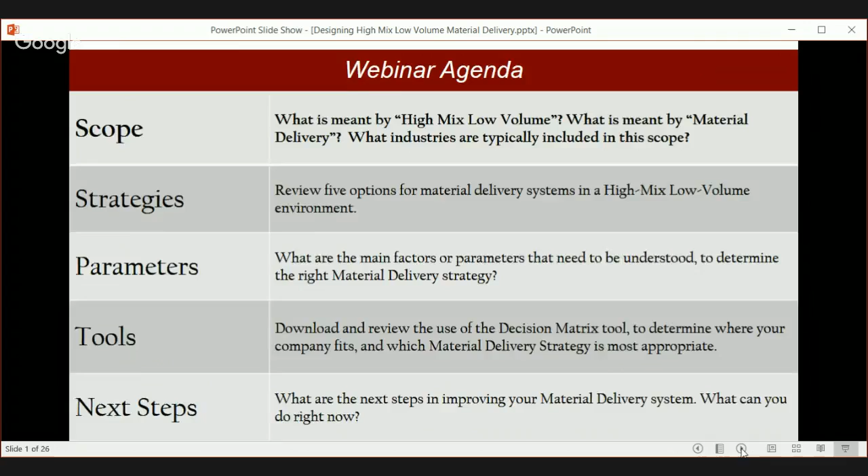What we're talking about with high mix, low volume is a production manufacturing environment with many different models or products. You could have base models, but typically in a high mix, low volume environment, you've got lots of options, or configured products. For example, you could have a base model 100, but the customer could order literally hundreds or thousands of changes, additions, or options to that base model. This is very typical, and I'm including that in high mix, low volume. It doesn't have to be completely different products—it could be base models with lots of choices, to the point where almost every product coming down the production line could have some differences.

That is not unknown. The main point is, from a material point of view, we have lots of different material to manage. By manage, I mean we have to buy it, get it in-house, and then get it to the point of use at the right time, in the right quantity, in the right container, and all of those challenges. That's the essence of high mix, low volume.

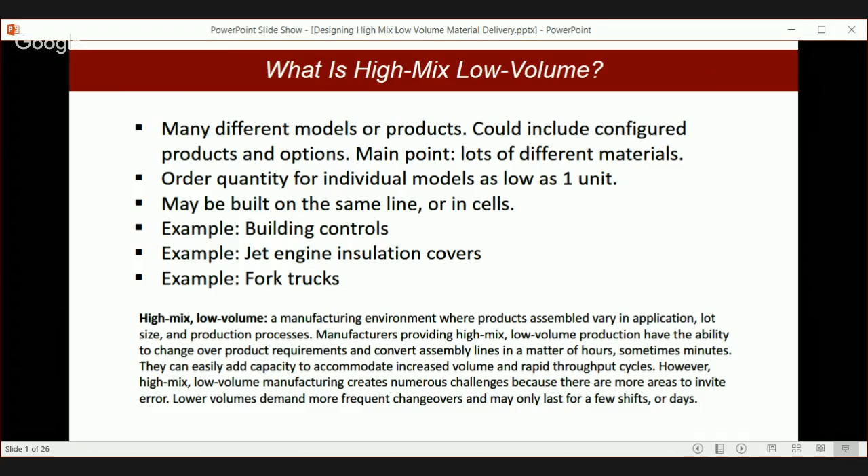Okay, so I hope that sets the boundaries then in terms of what we're talking about. Let's continue with some discussion of that.

Industries where typically the production environment is high mix, low volume: aerospace. As I mentioned, we don't build that many airplanes relative to other types of products, so it's inherently low volume. These aerospace suppliers in particular typically have a range of products they're supplying, but not that many of any individual product.

The other one is electronics and computers. Now, some electronics and computers are very high volume and very low mix, so mass production of some of these items. But we do have other types of electronics and computer products that are highly customized. For example, data storage, where a customer has very specific requirements, high involvement with your engineering design department, but you're not really building that many of any individual system, but they're configured to order or highly customized. So that would not be unusual.

Industrial products, what am I talking about here? I can think of a few places we've worked. One was industrial pumps, where again, they're building what may seem like a lot, but a lot of variety, a lot of unique characteristics, and mixing different pump sizes going down the line and having to deliver a lot of material to the same line. And then in general, I've listed here mixed model production. Again, to remind those of you who have worked with us in the past or been to previous webinars, we, Leonardo Group, we're kind of the mixed model guys.

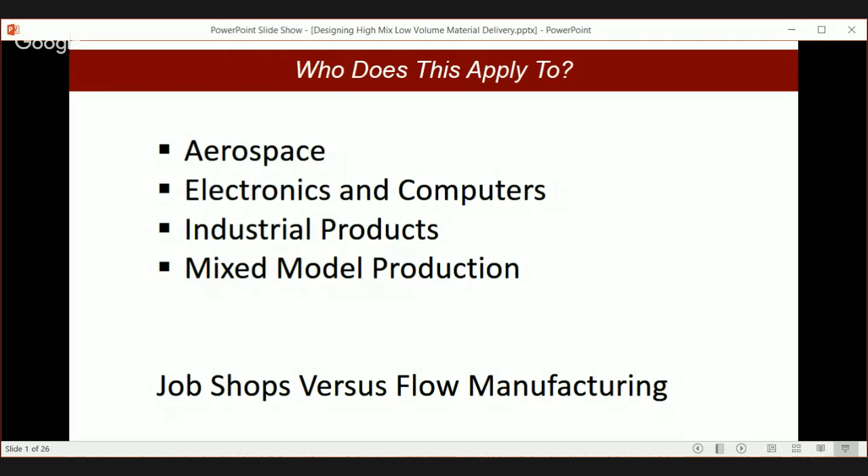I'm thinking more of production lines or cells, where you have sequential work and you're trying to deliver the material to a running line. Okay, so one more point in background, and then we'll get into the heart of it, the guts of it. What are our goals when we talk about material delivery? By the way, delivery means how do we get the material that was delivered from outside to where it's consumed, which is what I'm calling the point of use or points of use. So how do we get it there and meet the following criteria?

Number one, don't run out. Probably that's the most important thing. When you stop the line because you ran out of material, that's a big negative, because not only are you impacting all your internal processes, all the internal customers and operators there with nothing to do, et cetera. Huge waste, huge cost, but you're also impacting potentially your outside customers who are waiting for those products. So don't run out is kind of a big deal. We don't want to do that. So we want to have a system that's pretty bulletproof.

Now, I'm not including in don't run out your ability to procure the material from outside, from the outside supplier or from an internal department. That's outside the scope of this delivery. We're just saying, how do you design a delivery system to get it to where it needs to be, in the right time, in the right place, in the right quantity? The issue of getting it from outside suppliers is more of a supply chain issue, hugely important, but different.

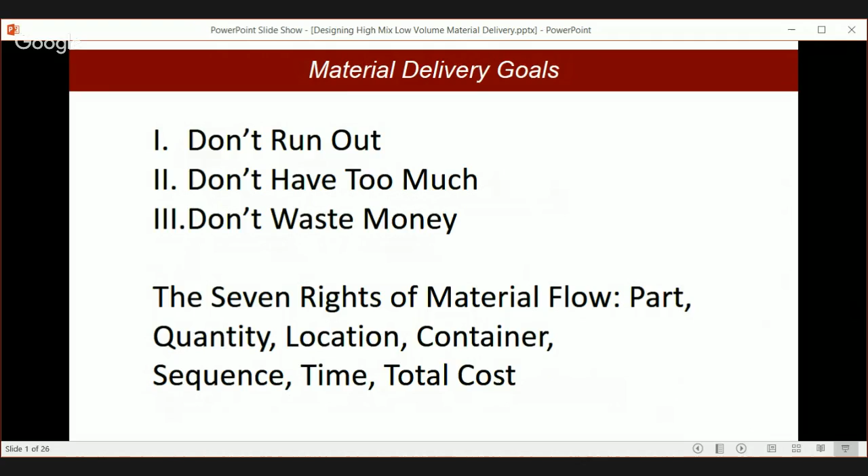So total cost is from the company, not just from the material management or material handling department, but from a company perspective, the right total cost. So if we keep all these in mind when we design our system, we'll be doing well.

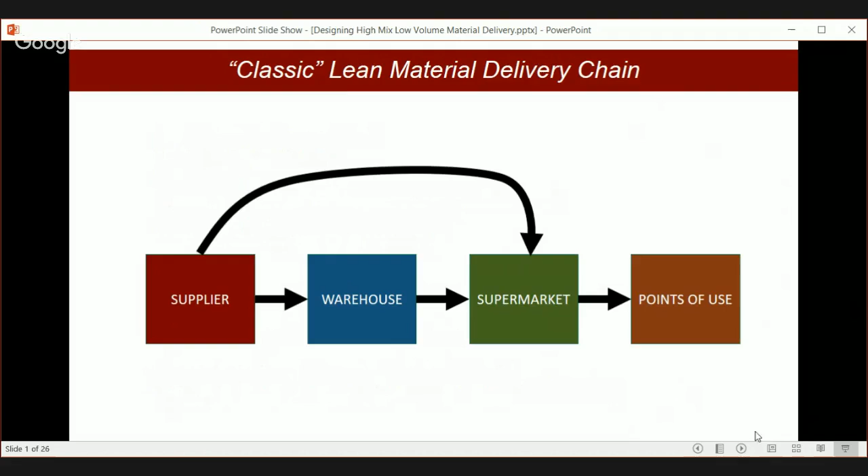But now we're talking about high mix, low volume. So let's get into it. I'm offering 5 options - different strategies that we've seen implemented depending on the environment. Let's go through them one by one. We'll discuss what they are and then show you the block diagram of how that might work for each. At the very end of the webinar, we're going to talk about how you might decide which one to choose. And of course, you don't have to choose just one - we have one of the options which is hybrid, so a mix of different systems.

So let's look at this first one, zero kitting. In the past, in my background as a lean consultant, maybe 10 years ago or even less, our philosophy with material was to try to avoid kitting at all costs. Because the logic at the time was that kitting is extra effort, and material handling is an overhead function or non-value-added kind of activity. So if we can figure out ways to just deliver that material to where it's consumed without having to kit it, that would be preferable.

Now, I'm noticing a sea change in that attitude over the last few years, where companies, especially leading lean companies, are much more open to this concept of kitting for a number of reasons. One of the reasons is floor space on the factory floor. Another reason is quality - reducing the choices that an operator has to make. And the third reason is operator productivity.

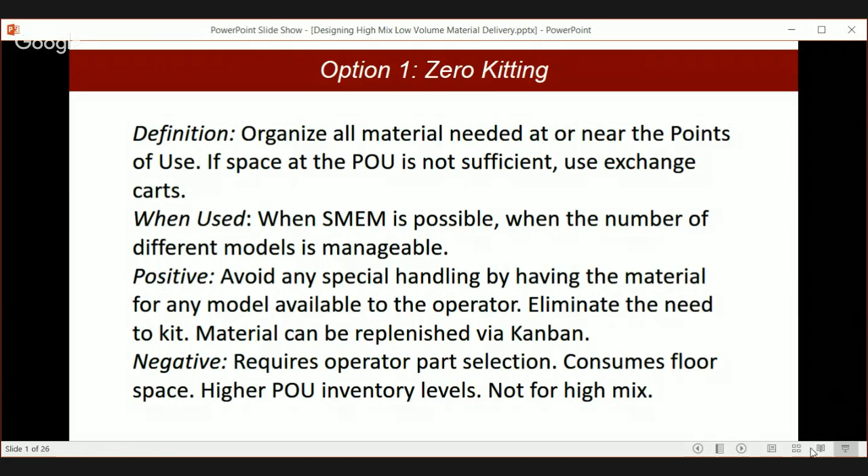Could be a two-bin system, say, on these carts. So at any given point of use, you might have more than one cart, you probably do. But in terms of replenishing those carts, it would be kind of a standard methodology. As a bin is empty, it gets put in a collection spot, and that signal goes back to a supermarket and it gets replenished, put back on the cart.

You would usually, to get this to work, need to have a longer takt time. If you have a very short takt time, it's hard to see how this would work because you do have a changeover when you're swapping out the carts. So it would be hard to overcome that changeover time if you have a very short takt time kind of environment.

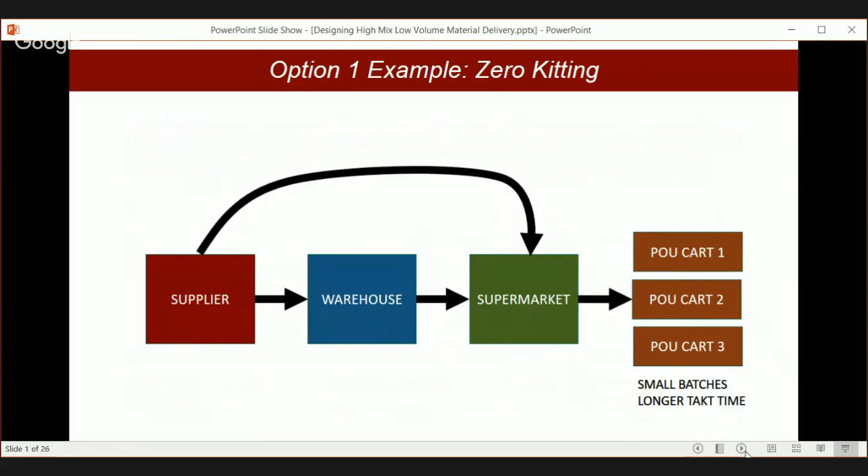You could actually use this as well for running small batches, so small order quantities could use this methodology. I've seen this method work, but usually it's in an environment where the number of different part numbers that had to be managed is lower. Still high mix, low volume, but not on the extreme in terms of the number of items that need to be stored on these carts. So that's your first choice.

Option number 2, kitting cells. So now we're entering the realm of kitting. Kitting is selecting a set of parts, not in front of the operator, but delivering to the operator a set of parts to be used for a specific model and based on a production sequence.

So you'd have to have a lineup or production plan. You'd actually have to have an MRP system, material requirements planning system, that would tell you not only what's required for that unit, but where, and eliminate from the pick list or kitting list the items that are already there, if you have a hybrid kind of scenario. This could be a set or a kit for a small batch, or even as low as a single model.

Now, where is the kitting done in this scenario? Well, it's done at the supermarket itself, not adjacent, although the supermarket is somewhere in the area, it's not adjacent to the points of use. And the reason for that is we're assuming in this scenario that you have a supermarket that's supplying many different points of use, multiple customers that you're supplying to.

Now, when would you want to use kitting cells? Clearly in a scenario where zero kitting is not going to work for you. You have too much variety to present at the point of use, and you have a shared supermarket feeding lots of different locations. So what you do is set up a cell, meaning a number of kitting stations, and organize that material in the supermarket logically, so that ideally someone could just walk in a U shape or walk down the line and restock kitting bins or kitting trays in an efficient way.

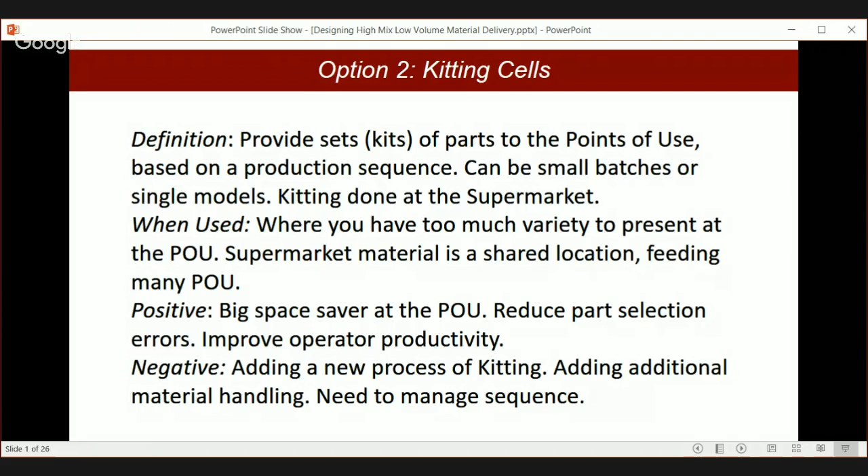Okay, so let's go on to the next one. Here's the example of the kitting cell. So what we have here is, again, classic up to the supermarket, and then the supermarket—before we go to the points of use, we have a kitting process. I added the reminder here: sequence. So materials stored in the supermarket, and from there we prepare kits in the form of trays or bins of the parts that are going to be required, and those are delivered to the points of use. You may even have a kit that travels with the unit, so it's not a matter of delivering a kit to lots of different stations—it might just be delivered to the first station.

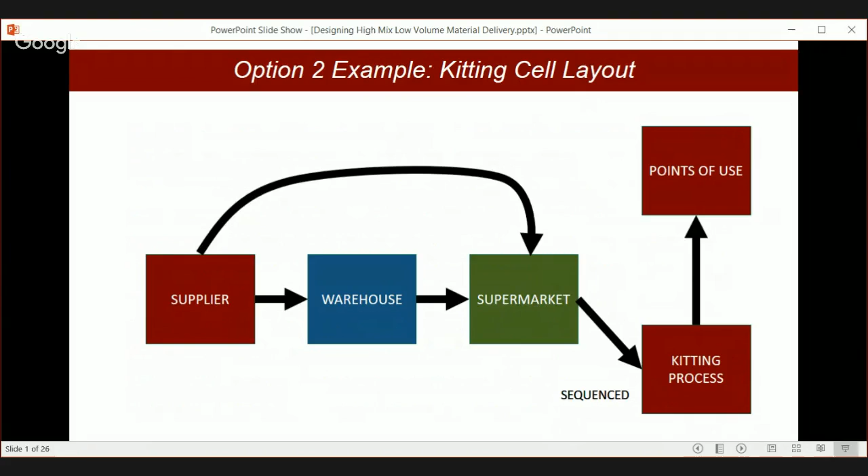And then that material isn't consumed in its entirety at the first station, but it travels with the unit down the line with all the parts they need for that unit. That'd be a good way of having a single point of delivery right at the line and not having to deliver material in a lot of different places. But this is how it would look. So this kitting process and the supermarket are really co-located, right? They're together. And then the points of use are wherever they are, not that far away, but they're not exactly next to the supermarket necessarily.

All right, so option 3, how are we doing on time? It's 11:40 Mountain Time, so we got 20 minutes. I think we can make it.

So the next one's called kitting integration. This is a great one. I've seen some great results with this. So what we're talking about here is, yes, we have too much variety. We need to do some kitting, selecting of parts. We can't just stage them in front of the different workstations. That's understood. But what we're going to do here is, instead of having a supermarket and a kitting process that's somewhat detached, we're going to connect it directly. So we're going to essentially add a material replenishment loop into our production line, and it's going to run at the same takt time as the line.

So when would we use this? Well, if you have enough volume to justify setting up what's essentially a specialty supermarket with the parts for this line only, and it can handle very high mix potentially. And what we're going to do here is integrate as an option the workstations and the material storage into the same unit. I'll show you an example of that here in a minute.

So what we're talking about here is, we don't have a material selection or a kitting process that's separate from the line. It's built into the line itself. So the cart or the container for the material, or the workstation itself, would go through a parts selection process for that specific unit. Every unit could be different. And then you have some workstations that it would pass through. And at the end of the line, when that unit is done, that cart or container would go back to the beginning of the line and get restocked for the next unit in the sequence.

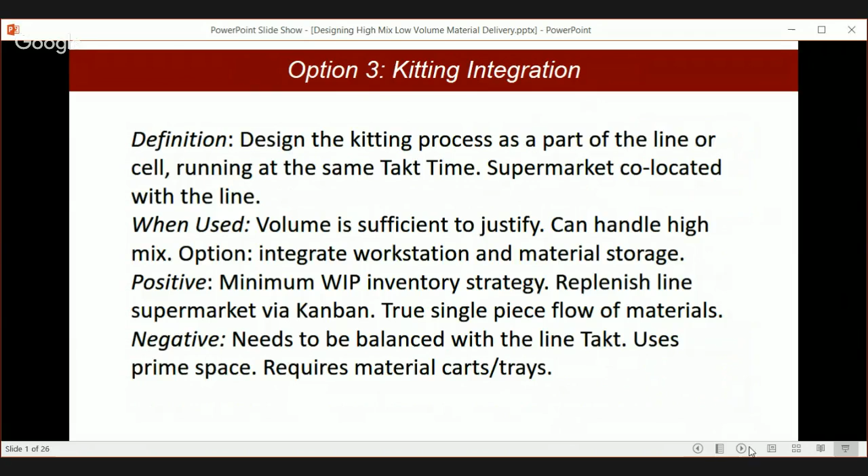So let's look at an example here, and then I'll show you a picture of how this might work. So again, supplier to warehouse, and I put a dotted line around the supermarket and the kitting process and the single line or the cell. They're all within this dotted line, meaning it's all an integrated process. So the supermarket is actually kind of a series of stations within this work area. And then the container, which could be a cart or a bin or an actual movable workstation, is going to go through this supermarket as a series of picking stations, and then it's going to go back to this single line or to a cell, and then once that unit is completed, it's going to go back through the loop again. So you have a continuously flowing loop all running at the same takt time.

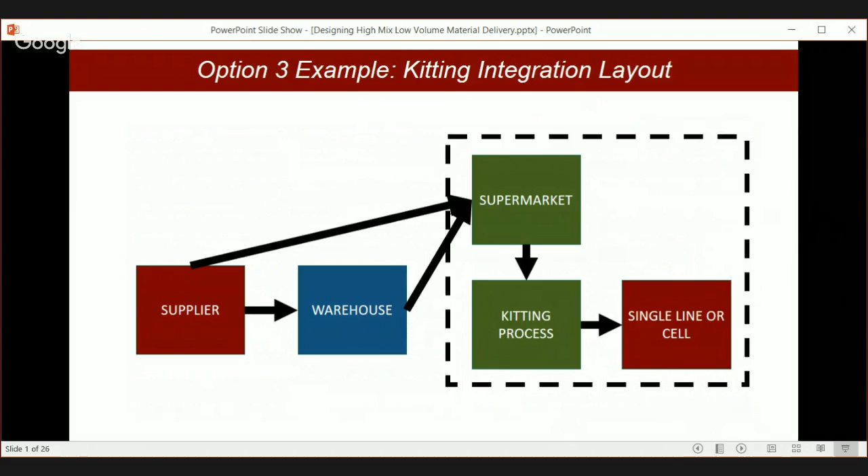All right, let's move on. Remote kitting is similar to the kitting we saw earlier, but in this case it's remote, meaning the kits are prepared off-site, not next to the supermarket. We're pulling material from the warehouse area, usually. So you have a kitting cell in the warehouse, and you're delivering the kits to another location, to the points of use as needed. We're bypassing the supermarket.

So when do you use something like this? Well, you could have a scenario where the material mix is so high that even setting up a supermarket would be a challenge—there are too many items to really want to set one up. There are definite benefits to a supermarket: early warning signal for shortages, improving inventory turnover, and ease of replenishment. But you could have scenarios where it becomes difficult because of the variety you have.

Another case where you might need remote kitting is if you have special kitting equipment. I can think of one example where they were preparing kits of cut specialty materials that needed a special environment. They had a large cutting bed with robotic blades that would cut templates out of this material, but they needed a special environment—some air control—because there was a certain hazard to it. Setting that up right on the factory floor wasn't really a good idea, or even possible.

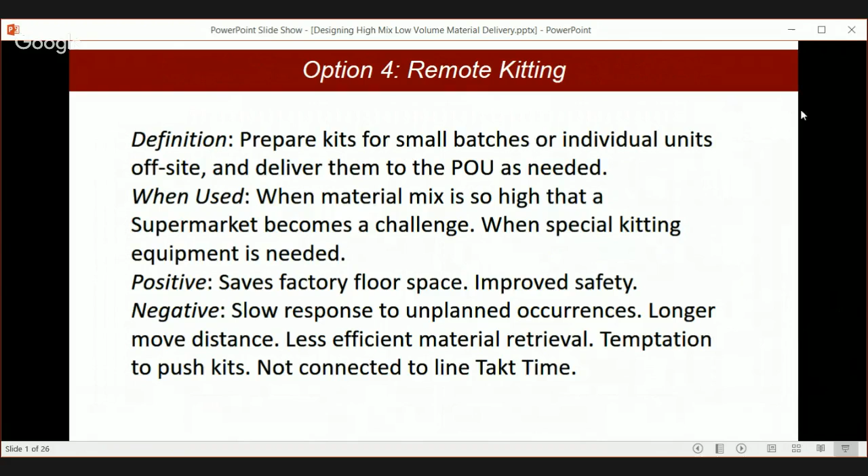So here's what it would look like in a picture. You've got a supplier, and then you have the material coming into the warehouse.

You've got a lot of this material, remember, a lot of variety, and you have a kitting process that you set up here in the factory, in the warehouse area. Now you could have a kind of a mini supermarket, but again, you've got a lot of material, so that was the challenge to begin with. But maybe you have a little more physical space in the warehouse to do that. But you've got a kitting process, and then it gets delivered, maybe even to another building, to the points of use.

So that is how this works, and you'll notice there's no supermarket in this case. All right, so that's an example. And I mentioned a company here. This is an actual company, Hi-Temp Insulation. This is exactly what they were doing.

This is the company that was making the insulation covers for jet engines, and the kitting process involved cutting this material. You can imagine asbestos was involved, and so this was not something they could do on the factory floor. They had to use a controlled environment, and they had these cutting beds, producing kits of maybe 10 pieces, 20 pieces, small batches, but it really had to be done in a controlled area. It was in the same building, but an entirely different area, not that close, and in a controlled environment.

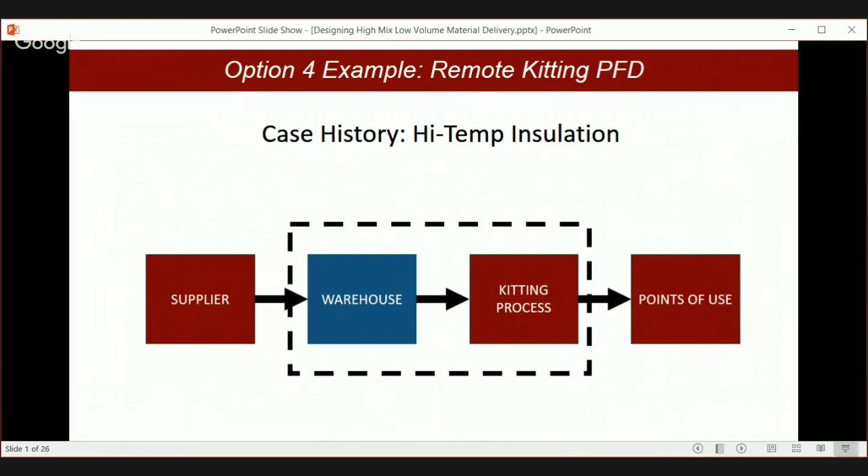So remote kitting. Now here is the last one we'll get to, which is probably the most common, which is called hybrid material delivery. So we're saying here, you don't have to pick one of these four. You can do a combination thereof, try different techniques for different things. So it's a combination of the methods we just covered.

So what we're saying here is some percentage of the items that you need to manage are going to be stocked at the workstations, at the points of use, via Kanban usually. And then other parts will have to be kitted, or they'll have to be sequenced. And so this is an extremely common way of handling a high mix, low volume environment.

Now, you would use this when a certain percentage of the parts that are consumed are common. It's not going to work super well when you have every unit with a totally different bill of material. But when a high percentage of the parts are common, used on multiple base models, for example, then you'd want to set those parts up under a classic Kanban methodology, either two-bin or multi-bin Kanban. You can even use this methodology for the same type of item.

For example, hydraulic cylinders. We've seen an example where this particular factory had, I think, something like 12 different hydraulic cylinders, but only 2 or 3 of them were the high runners, and the others were much lower volume. So instead of setting up 12 Kanban multi-bin scenarios, they set up 3 for the high runners under classic Kanban replenishment, from a supermarket back to the line.

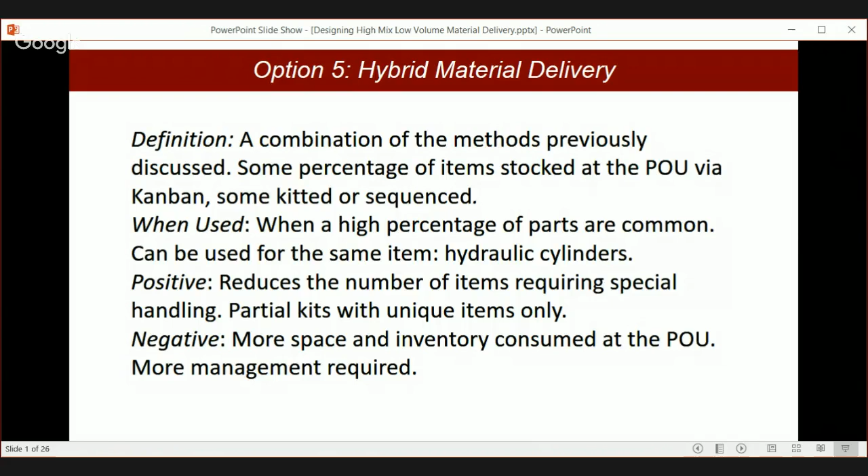This is pretty classic. I noticed some people are leaving. Hang in there for just a minute or two. I'm going to give you a couple examples. I know it's 11:58. We might run over a few minutes, but not much. So here's the hybrid scenario.

You've got a classic supplier to warehouse to supermarket or supplier to supermarket, and then some of the items are going to go through a kitting or sequencing process, and some of the items are going to be replenished from the supermarket via a Kanban signal. Again, classic, extremely common way to handle this. And this is, in fact, how they're doing it at Toyota Material Handling in Columbus, Indiana.

Some of the items, many of them are under standard Kanban control, and many of the items are either high dollar items coming from Japan that are not good candidates for Kanban, or simply the unique options that are typically found on every single unit coming down the line. So they're managing both. I think it's actually 3 different areas.

So they're regular delivery tuggers that come by often. Their cycle on their tuggers is about 32 minutes, if I recall correctly. But those tuggers are going to get restocked at 3 different areas: imported parts, Kanban area, and then sequenced parts. And just do that loop, continually many times a day.

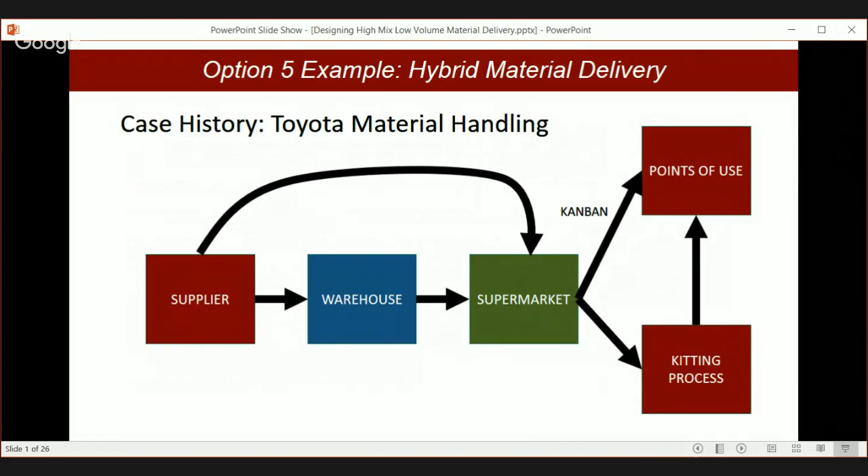Okay, couple tricks. If you have a remote kitting process, what you don't want to have them do is push kits. So what you don't want is a kitting department with a dispatch list and some kind of rule that says X number of days before it seems to be due in production, we're going to prepare this kit and we're going to push it to the production area. You don't want that. Now they need to know what to do next, but they use the dispatch report as a sequencing, not as a demand signal directly.

So the demand signal is going to come from, in this example, a rack. I mean, this is something we actually did. So we had a kit rack. This is going to hold a tub of parts in the example we worked on. It's going to hold a certain number of those. And the signal would be an empty space on that shelf or a card that represents an empty space on that shelf. So the kitting department is responding to those signals.

Give me another one. What was happening prior to this methodology is they were flooding the factory floor with kits that were not needed. And if kits sit around for a while, you know what happens. Parts get cannibalized, they get lost, they get dirty, all those things. So we set in place a pull signal, but it wasn't for a part or a specific item, it was for a kit.

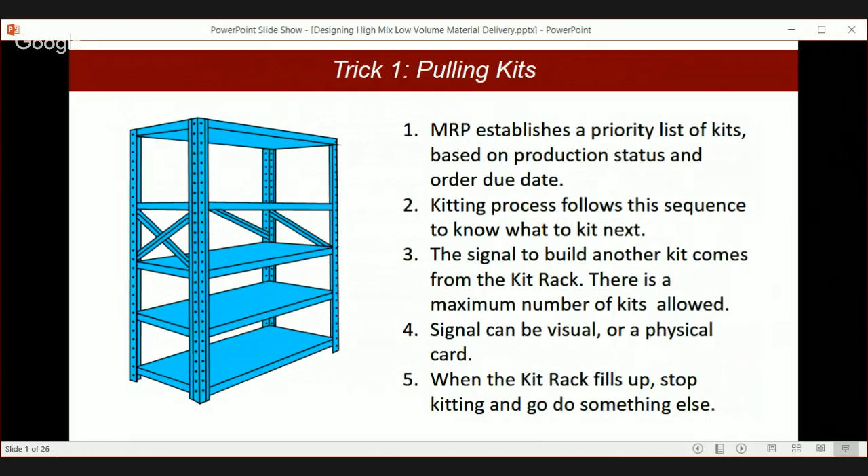And that was very visual. So if you have an empty spot on one of these shelves, bring me another one, basically. And the spaces were organized in first in, first out kind of logic. So that's a great way of controlling the kits coming out on the factory floor with enough lead time from when the kitting department gets the signal to be able to do the work that they need to do. Also needs to be considered.

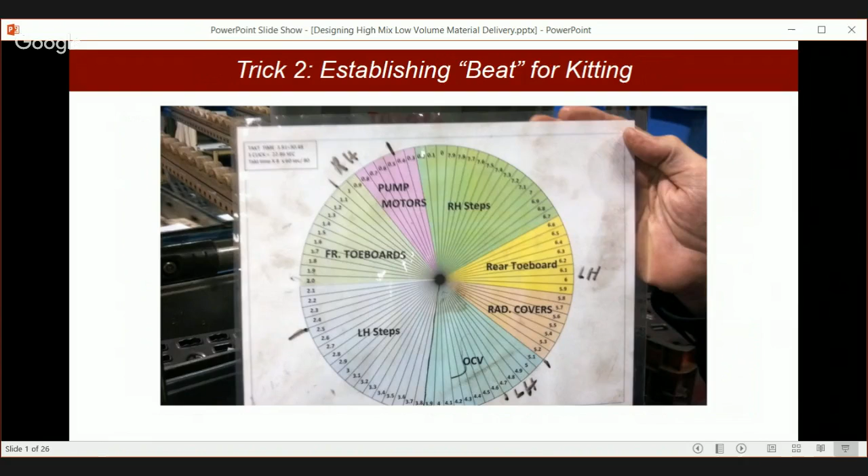So it's really tied to the frequency of the tuggers coming by, which is, again, about every 32 minutes or so, this sequence of work would be done. And this rhythm wheel was just a little reminder of that sequence and kind of how it would break out in terms of the time requirements. So this was pretty cool, and it's working extremely well.

So last point, how to decide. There are some parameters that you would need to establish for your particular factory that you need to understand to get some feel for what the right methodology might be for your factory. So some of the things you need to know are, what's your current level of part commonality, model to model? So do you have common parts that are used on base models, for example, or is every product very unique? Do you have material traceability requirements? For example, aerospace has pretty strict traceability.

So if there's an air accident, you can trace back, if you need to, all the way to, in some cases, the mine where the titanium was mined. Also, medical products have traceability requirements, military products have traceability requirements, et cetera. So if you have that, it makes it more complicated to use just a standard classic methodology.

Number of different models - what are we talking about in terms of variety? Number of different active part numbers - how many are we trying to manage? Warehouse distance from the point of use - is it in the same building, across the parking lot, or in some cases, we've seen it be quite a few miles away? That could make a difference in what you choose.

And then finally, what's your current level of mixed model manufacturing? Are you doing true mixed modeling? What's your current manufacturing methodology? That's going to make a difference as well.

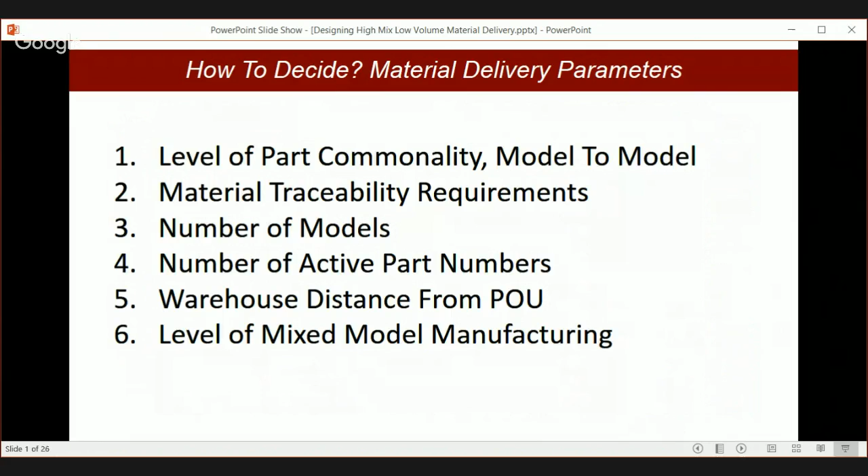Now, to help you with that, we're going to send this to you. We don't really have time to get into how this is going to work, but I think you'll see. This is a simple spreadsheet that lets you rate on a scale of 1 to 100 your current level of maturity, or your current reality, in these different parameters. And if you click on this, you'll see the rule - it's a bunch of if statements that will give you a suggested strategy if you have these characteristics.

So for example, level of part commonality: a 1 would be all the models have exactly the same bill of materials, so there's complete commonality, or a 100 would be all models have completely different parts. So if you're at a 100, you're really looking at a remote kitting methodology, because probably you're going to have way too much different material to talk about setting up a supermarket or stocking the material at the workstations. So that's the kind of logic we've applied here.

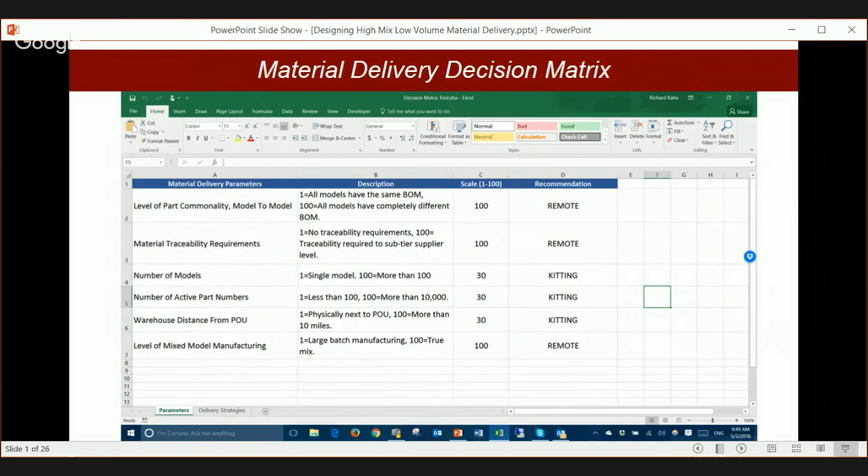So this isn't rocket science, but it's very useful in terms of structuring your thinking, structuring your discussion with your team, using something like this, as opposed to just having an open-ended discussion with no tool, no methodology. So we'll send this to you - it's an Excel file, and you can modify it to your heart's delight.